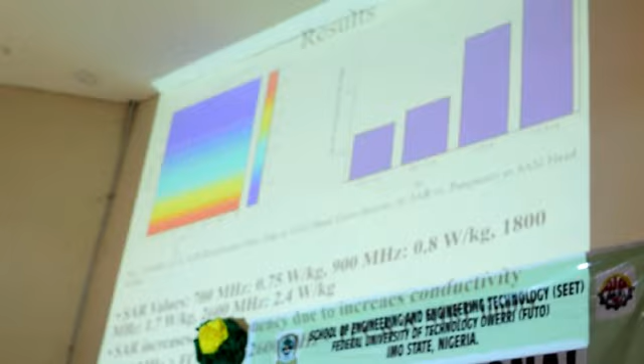Now, the results, I wish we had it on the slide. We have 2 graphs. One we call the heat map. Now, the heat map, what does it do? Okay, those are the 2 graphs. One is a bar chart, the other one is a heat map. The heat map, you can see at the bottom there, we have a somewhat reddish color transitioning from that to yellow and so on. Now, what this is telling us is that by the time you place the phone on

your head, the heat, physically you normally feel the heat of the phone after a while when you're making the call. So you can see that's the heat on your skin. But as the heat travels in your body, it is cooling down. So by the time you get to that blue section, it has totally cooled down. So you can see that part is your skin, not even going into your head. The skin surface is the outer layer, the epidermis. That is what will feel the drop of the heat.

But by the time it goes into the skin, just your skin, the length of the skin, you see 8.5 millimeters there. That is the thickness of the human skin, combining epidermis, dermis, and the subcutaneous part. So as it goes in, the temperature tends to drop. That describes the heat, and that comes from using the SAR and calculating that.

Then the bar chart is to show us the rate of SAR with frequency. You can see that there are 4 frequencies there: 700 megahertz, 900 megahertz, 1.8 gigahertz, and 2.6 gigahertz. From observation, you can see that. Okay, to conclude, you can see that with frequency, we have an increase in the SAR. If you are talking about a specific device, most of these devices come with a specific SAR, and that SAR is used for different frequencies. It's a whole different story. Thank you very much.

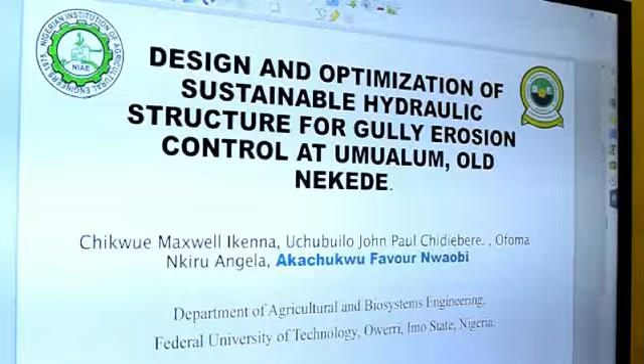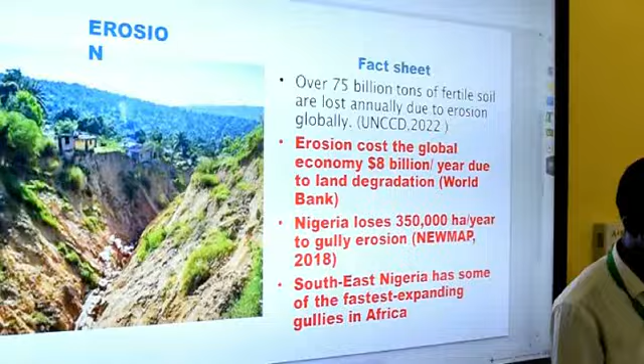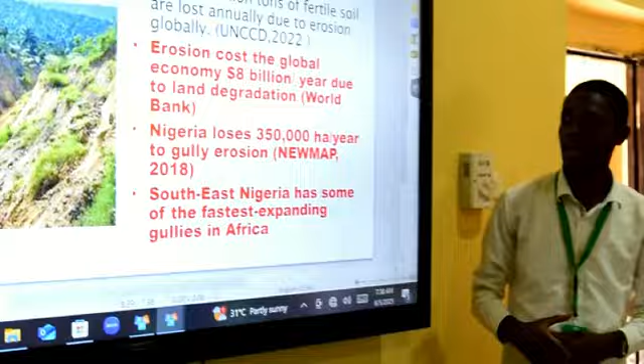I am Akachukwu Nwaobi and I'm presenting on behalf of the group: the design and optimization of sustainable hydraulic structure for gully erosion control at Nekede. Of course, we know that erosion is a global problem that involves the removal of soil particles by either man-made or natural factors such as air, water, and wind. Erosion costs almost $8 billion per year, and Nigeria loses 350,000 soil hectares per year by erosion. And southeastern Nigeria has some of the fastest expanding gullies in Africa.

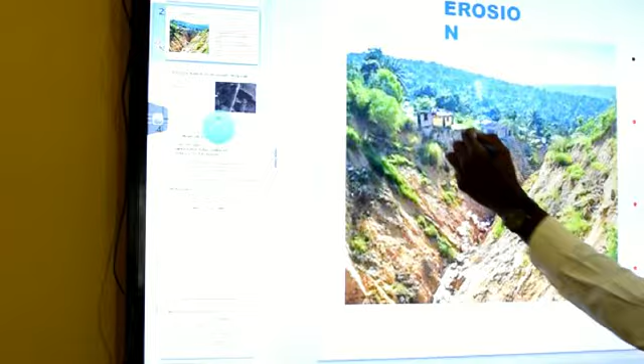So to deal with this problem of erosion, our case study is Umualum Nekede. With our GPS, we were able to capture the location, and we analyzed the geology of the area, the hydrology of the area, the kind of rainfall we have in that area, and we see the impact of erosion in this area, which is farmlands are destroyed and roads are cut off. So it begs the question, how do we mitigate this problem? The simplest or most sustainable way is to make way for the water, by building a very sustainable hydraulic structure to allow the water to pass.

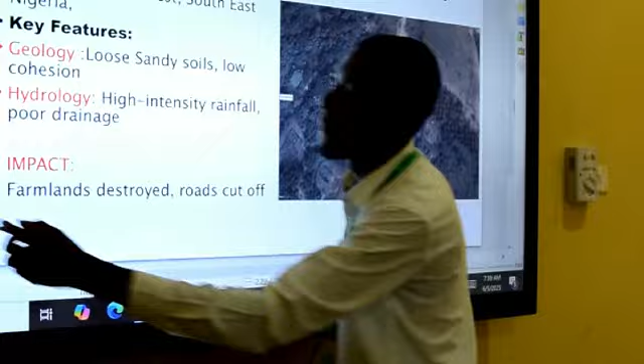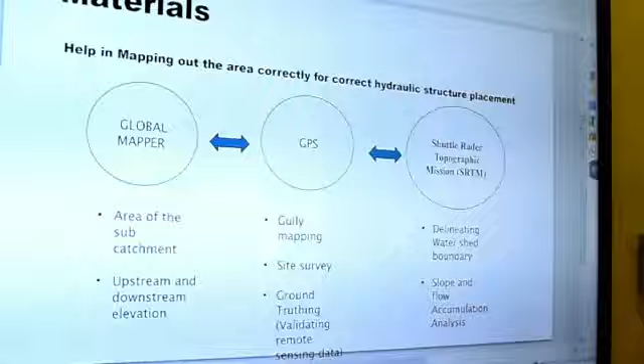And for us to do this, we made use of tools such as the Global Mapper, the handheld GPS, and the Shuttle Radar Topography Mission, combining this with GIS to get every information we need about the watershed in order to design a good hydraulic structure for that region.

Firstly, we carried out a watershed analysis for the time of concentration, which is the time it takes water to move from the farthest part of the catchment to the outlet of that catchment area. The time of concentration is a function of the overland flow and the channel flow. To get these two parameters, we made use of the Kirpich formula, which is a classical formula, and the Kerby method. To get the overland flow, we made use of this model, which has been accurate owing to the parameters we gathered in that given catchment.

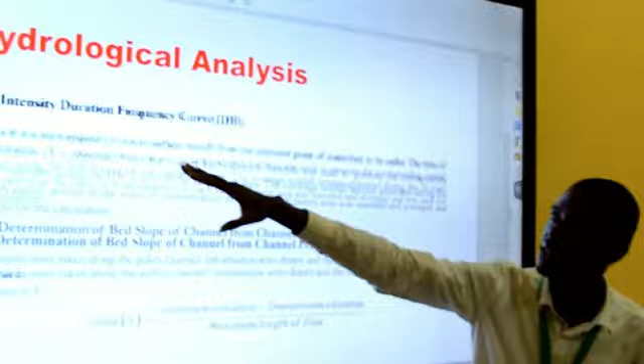We carried out hydrologic analysis using the time of concentration to get the intensity of the rainfall in that area. After getting the intensity of the rainfall, we went ahead to get the slope of the area, which is just a function of the upstream elevation and downstream elevation of the catchment over the maximum length of flow.

Now, after getting this, we use it to get the peak rain, the peak flood that we can get from this area. With this peak flood, we can now design a sustainable channel that can carry out this flood, hence mitigating the problem of erosion in that area.

And to do this, we proposed the use of a horizontal channel and getting the area using these classic formulas, after which we were able to calculate the wetted perimeter, and then we went ahead to calculate the velocity of flow using the classical Manning's formula, and then we calculated the discharge from there. So if the discharge we get at the end of the day is greater than the peak discharge we calculate using the hydrologic parameters we gathered from that watershed, it means that our design is sustainable.

So with this, we're able to design a very good channel to convey the amount of water coming out from that region. But as a matter of safety, we also added parameters such as freeboard and the top width to make sure that in case there is any overflow in the catchment as a result of maybe rain exceeding the return period, any flood exceeding the return period, we're not going to have a disaster in the region.

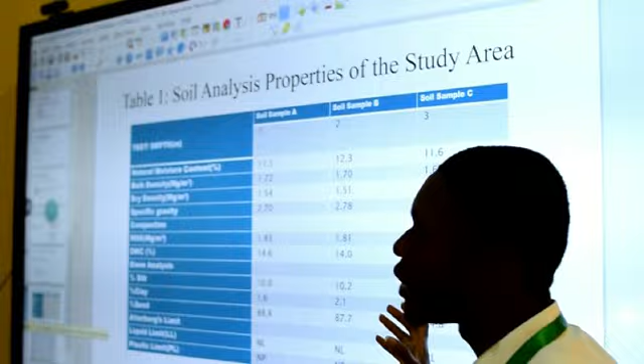So finally, by the time we carried out some of the analysis in the region, we got some of these, which I'm not going to list out. But it was what informed the decision we took in the design. And at the end of the day, we carried out many other analyses using the classical formulas I showed you to get these various figures used for the design of the channel.

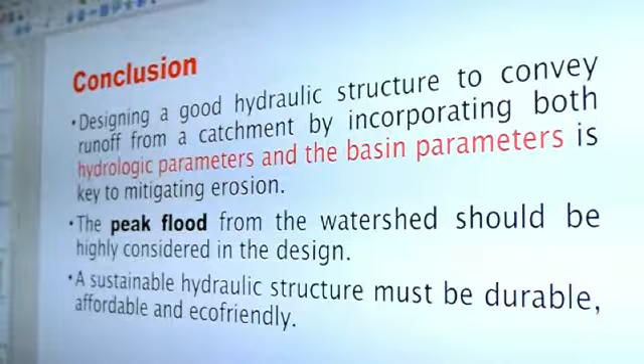And lastly, to just round it up, we discovered that designing a good hydraulic structure to convey runoff from that catchment has to do with involving both the hydrologic parameters and the basin parameters. So the peak flood from the watershed should be highly considered in every good design, and a sustainable hydraulic structure must be durable, affordable, and eco-friendly. Thank you.

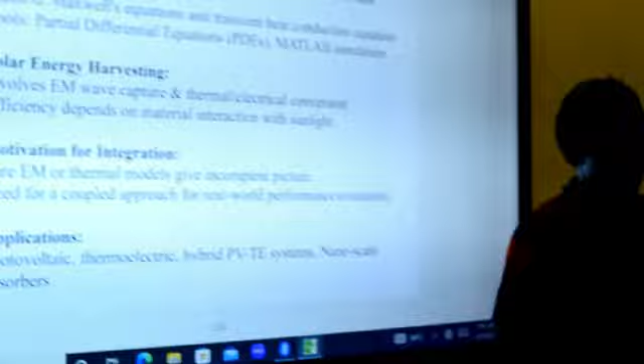Need for a coupled approach for real-world performance evaluation. Like I said before, that's exactly what it is. Like we say, two heads are better than one. So combining the two together, that is what it's giving you. Applications: photovoltaic, thermoelectric, hybrid photovoltaic thermal energy system, nanoscale absorbers.

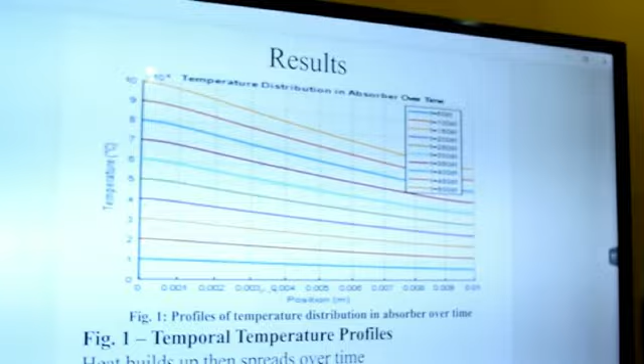Okay, so you did some simulations, and these are the results. This is the result of the simulation. This is showing how the heat is distributed in that material that you are using. You see your solar panel. You look at it, it's like a glass surface, isn't it? The actual material that is absorbing the photon is there.

So, just like you have the potential difference, you must have the high heat section and the low heat section. And this, we use Neumann and Dirichlet boundary conditions to achieve this. So we have the boundary condition at 100 degrees Celsius and 25 degrees Celsius. So, conclusion. It follows EM penetration pattern. I think that's part of what I just discussed.

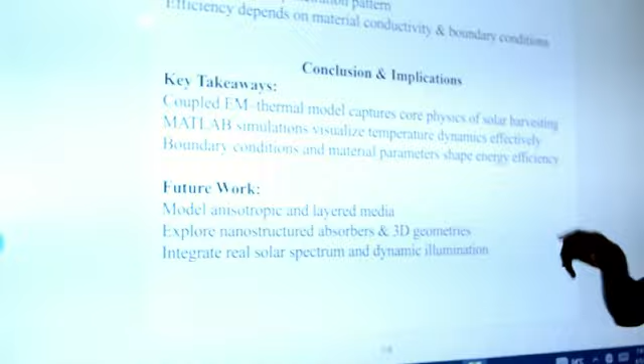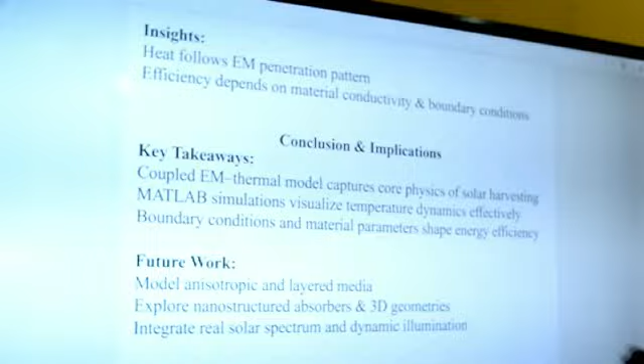The key takeaway: coupled EM thermal captures core physics of solar harvesting. Then the MATLAB simulation, with which we visualize the temperature dynamics effectively; boundary conditions and material parameters shape energy efficiency. So for future work, model anisotropic and layered media. Then explore nanostructured absorbers, 3D geometries. And finally, integrate real solar spectrum and dynamic illumination.

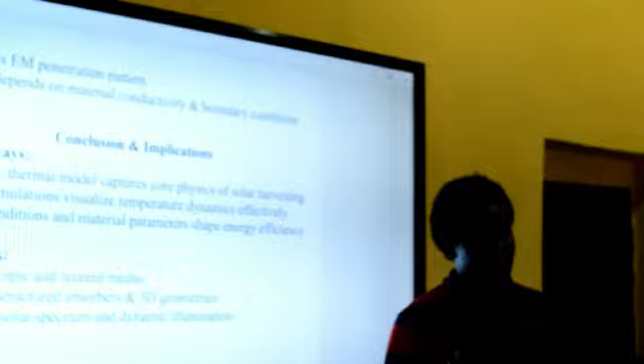So that, in a nutshell, is how you theoretically explain the combination of the photon energy generation and the solar heat energy generation and combine them. A round of applause.

J.S. Nzube with K.C. Chinedu, C. Chiabotu, and R. Uche. The representative will be presenting on the topic titled Design and Development of an Automated Car Wash using a PLC-based system. Okay. Titled The Design and Development of an Automated Car Wash using a PLC-based system. This is in line with the introduction of the smart city, urban engineering.

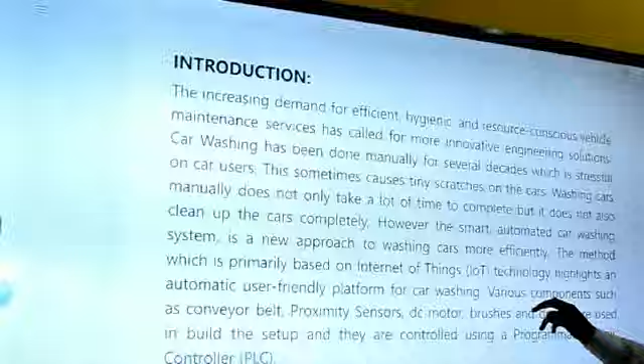With increased demand for an efficient and hygienic way of vehicle washing and maintenance, the introduction of this system is going to solve the problem we have when it comes to manual washing of our vehicles. Introducing this system will help to save labor, be cost efficient, and we are in line with the introduction of the smart city and urban development.

When it comes to the problems we face with our normal traditional way of washing cars, which is the manual way, there is the consumption of excess water, reliance on heavy manual labor, lack of consistency in cleaning, and integrating with the smart infrastructure framework.

Like we all know, this is an automated system, and we know in our current industry the vital role that automation has, starting from the production industry, our refining industry, and the rest. So,

I think you should state the objectives. They're very important. Yeah. The main objective of the study was to design and develop an automated car wash system controlled by a PLC. A PLC, or programmable logic controller, is the control system used in the industry that helps to automate different kinds of systems. It helps to save labor and makes things faster.

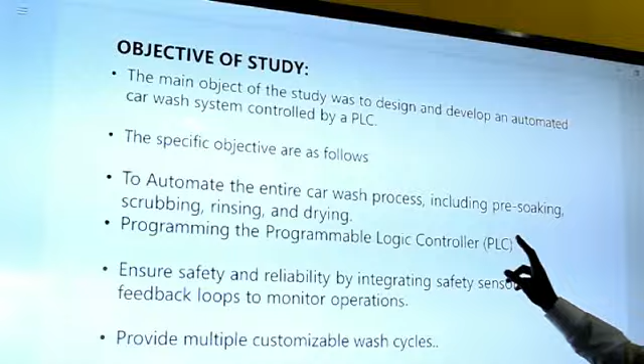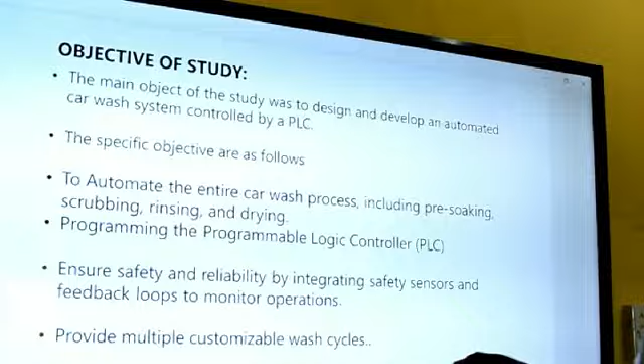And to automate the entire car washing process, including the soaking, the scrubbing, the rinsing, and the drying system. Programming this programmable logic controller to suit the need of that particular system, ensuring safety and reliability by integrating safety sensors and feedback loops to monitor operations, provide multiple customizable washing, and integrate the use of IoT in the sense that the owners of this car wash can know the number of washings done, how much they have made, monitor the system and change it based on the need of the users.

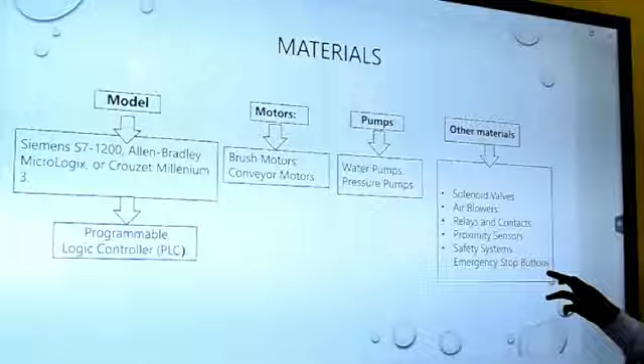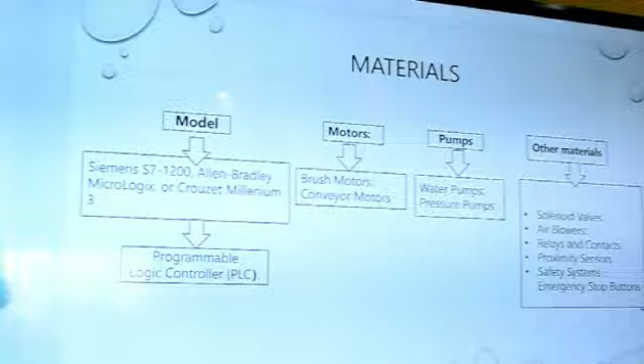This system reduces manual labor, ensures consistency in cleaning, and minimizes the usage of water. The materials in this system: with the use of special instruments like the valves, relays, blowers, pumps, brushes, and our main mastermind, which is the programmable logic controller, this system can be achieved. Why we focus more on the PLC is that in our modern industry, this PLC has offered a lot to us in terms of making work easy and giving us smooth processes.

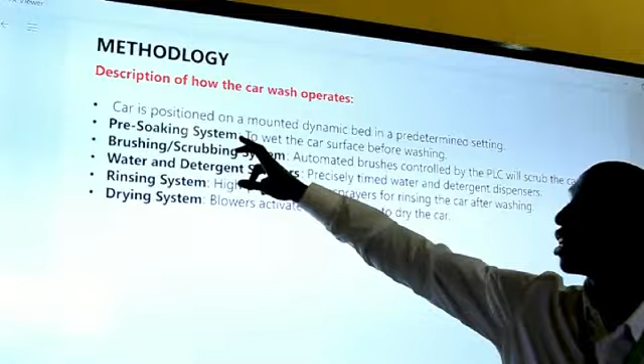So these are the processes involved in how the car wash will be made. When the user of the car wash brings his car, he parks it in a good position. Then the system starts. When you make your payment and select the type of washing you want, you start with the soaking, then the scrubbing. After the scrubbing, the rinsing, then the drying. These are all done automatically.

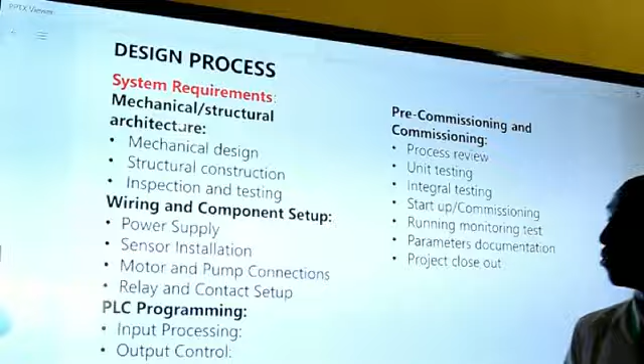So in this system, there are different design processes involved, starting from the mechanical and the structural, which is the bay. The civil engineers will design the bay where the car wash system will be developed. The mechanical engineers will do the metal work and everything.

Then when it comes to the wiring and components, the electrical engineers will come with the installation of the sensors, the motors, the pumps, and lots more. Also the electrical engineer will do the programming of the PLC, because this PLC can be programmed to do anything we want, however we want it to work. Then the commissioning. So this is a sample video.

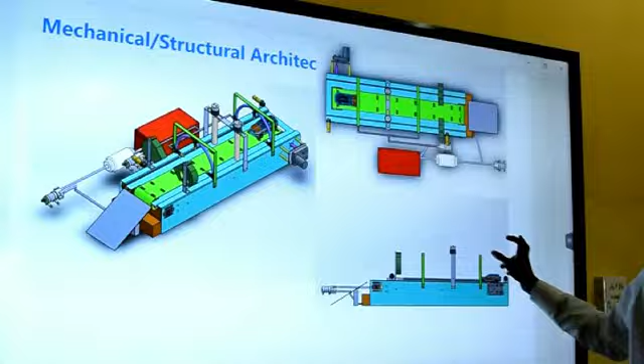So this is the design I made, and by God's grace, a working prototype of this project was designed early this year. It was used in my final year project in February, supervised under Professor Benuche and Engineer Chukwuebuka Kinsel.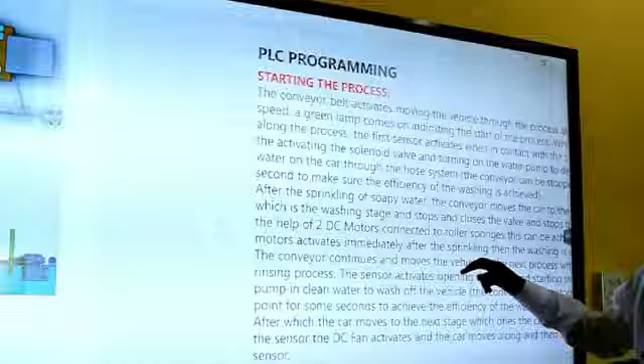So as you can see here, this is the water recycling component. The working prototype is at the department. This is the water recycling component with everything here. The time is almost up. So this is the process, or the program. This is how it will look when you're inputting or writing the program in the PLC.

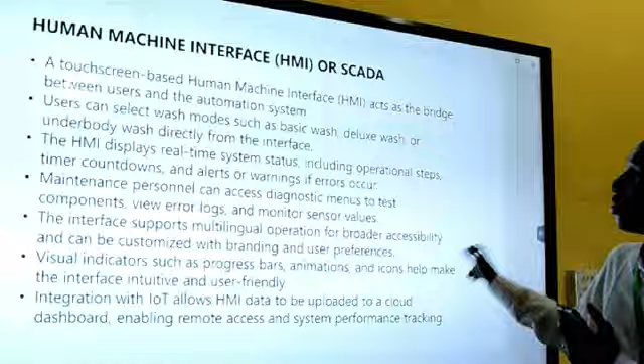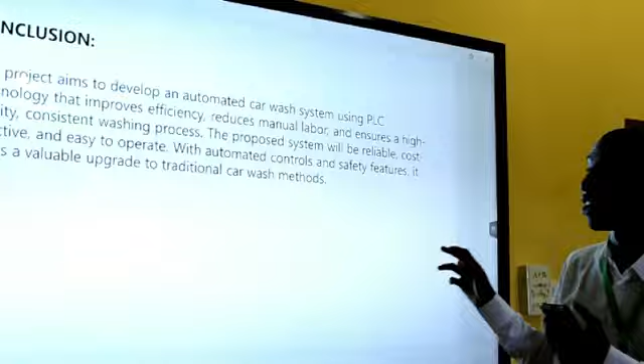So, with this process, the average time you can use to wash a car is about 3 to 5 minutes, which will save you time, unlike the conventional manual process, which takes over an hour, and the consistency in the manual process isn't very high.

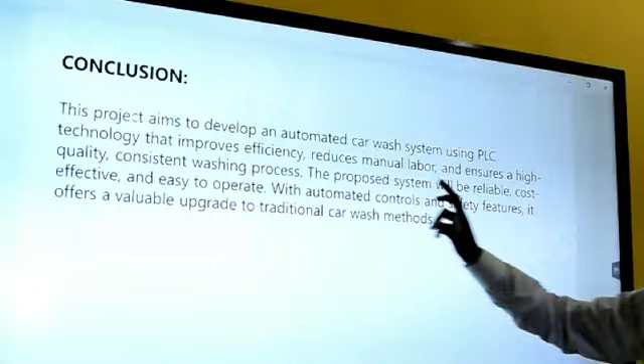The primary aim is to develop an automatic car wash using PLC technologies to improve the efficiency, reduce manual labor, and ensure a high quality, consistent washing process. The proposed system will be reliable, cost-effective, easy to operate with automated control and safety features. It offers a valuable upgrade to the traditional car washing system.

Wow, that would be very wonderful.

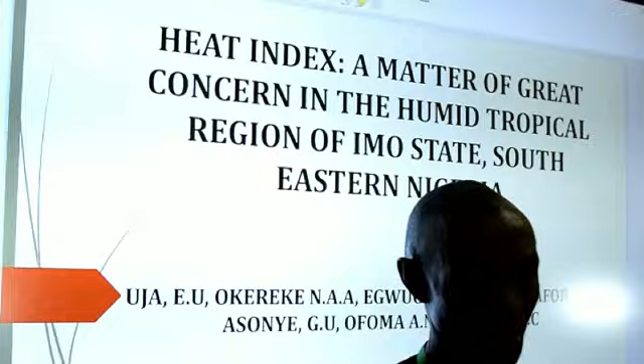After I reviewed a paper for the International Journal of Environment and Climate Change about heat stress and heat index, I felt that we in the humid tropics should have knowledge of these things. Because when I reviewed that, I discovered that most of them were having stroke there. So to do this work, heat index, what is heat index?

Heat index just means what the relative humidity could do to the air temperature to move it up, to bring it up. And what is relative humidity? Every level of temperature has a capacity to take moisture. But the moisture in the air may not be to that capacity. If it is not, then the temperature can absorb more moisture. But where the moisture in the air is so much that the temperature can no longer absorb moisture, that is the critical stage.

Oftentimes at night, you see yourself sweating profusely. Ask yourself why. The windows are okay, ventilation okay, but you see yourself burning like you had a bath. It's because the moisture in the air is so much that the air is no longer taking what comes out of you. Are we communicating? To get the data for the study, I went to NiMet.

Can you present the data with slides? The introduction.

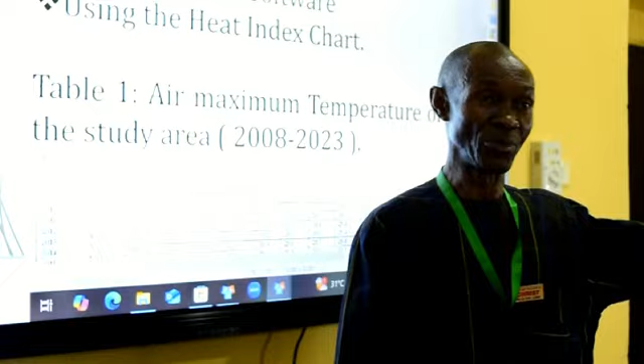The air maximum temperature and the relative humidity of this state. Before transferring to heat index, I used the Statistical Package for Social Sciences to see how they correlated. I discovered that any change in the relative humidity will cause over 80% change in air maximum temperature. That gave me the correlation.

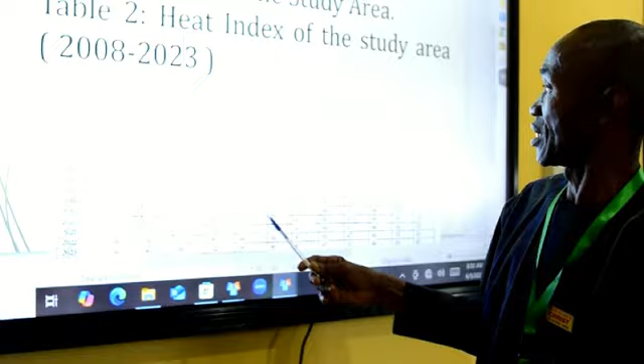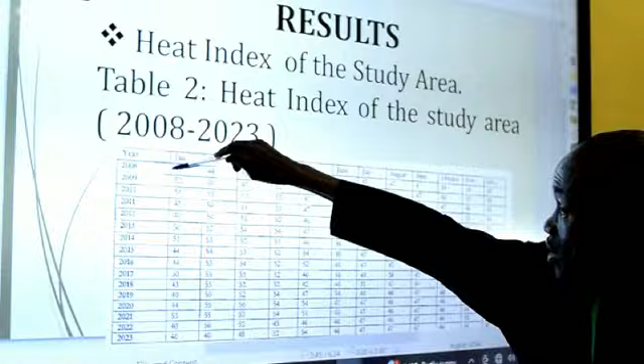Now, to the heat index proper, these are the data of the heat index. Going back, this is the air maximum temperature. With the heat index chart, you take the value of January and the relative humidity of this place, and you go to the heat index chart to see the heat index of this point. So I got the heat index of each of the months from 2008 to 2023.

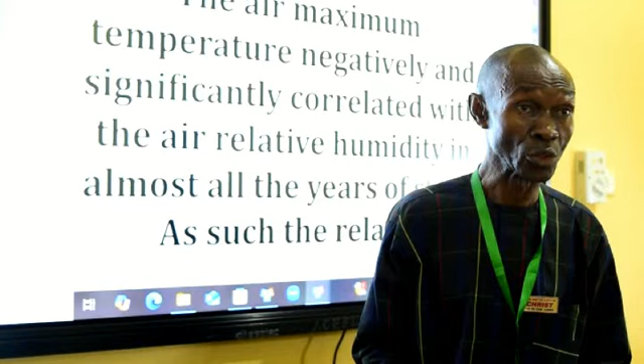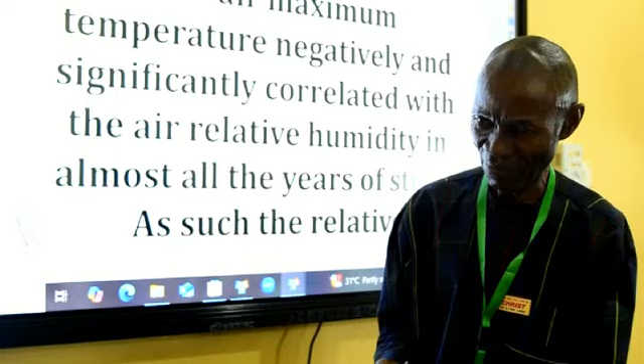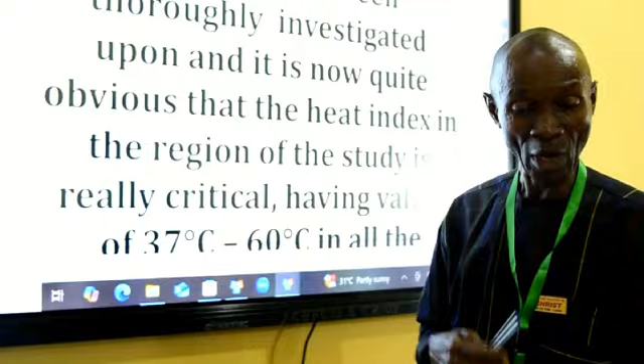If you check through the study, I discovered that I got from 37 degrees centigrade to 60 degrees centigrade because of our relative humidity, which means that we are exposed to heat-related sicknesses. So it's not a function of going to the hospital. It's important to know what causes what. So this temperature is exacerbated by relative humidity in this place. So how do we go about checking this to live long?

Now, my advice is this. If you have a fan in the house, maybe the place is hot, and you on your fan, be careful. It may blow hot and give you hot air, whereas this thing is not in the room. It's in the atmosphere.

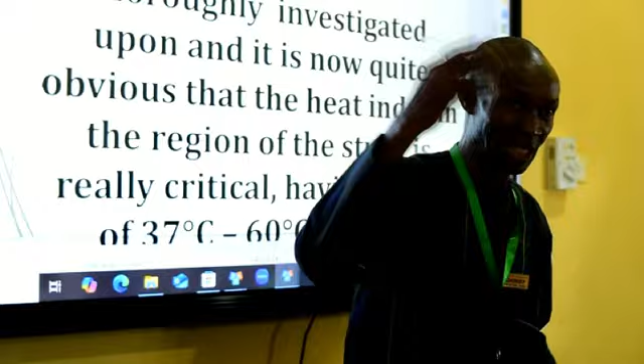One other thing I will advise us, anything you do, like generator sets, activities that will exacerbate evaporation of moisture, let us reduce it. Because the more this moisture is evaporated, when you perspire, the water vapor may not get out of you to refresh you. It becomes a problem.

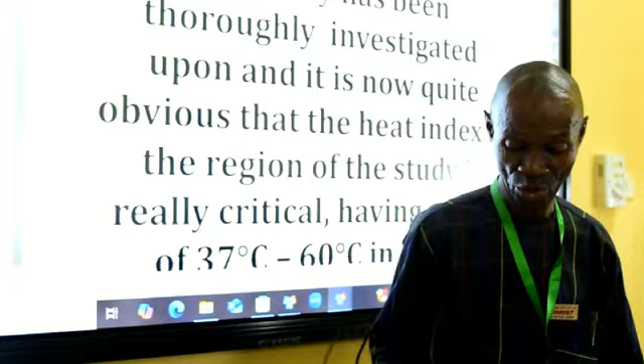I think most of the presentations here are about things we witness in our day-to-day activities. Sometimes we get warnings either from the internet or from the media that the heat waves are going to be high, and you are advised to hydrate yourself with water. And this is a typical example of another method that you can apply to be able to help yourself out during such conditions.

So thank you, Mr. Oja, for this presentation. In other words, if we can take care of our environment, we are indirectly taking care of our health. Thank you very much, sir. Thank you.

Engineer Professor Remy Uche, Fellow of the Nigerian Society of Engineers, and the Dean of the School of Engineering, Federal University of Technology, Owerri. Thank you very much. You know that conferences are an integral part of academic teaching and research. At conferences, we try to do an exposé of your research products. At conferences, you meet colleagues from different locations with different mindsets to exchange ideas and views on the current trend.

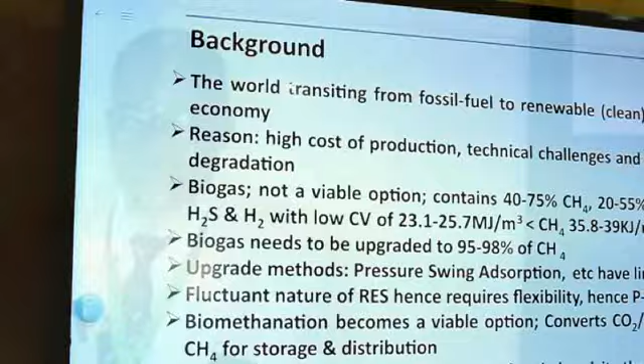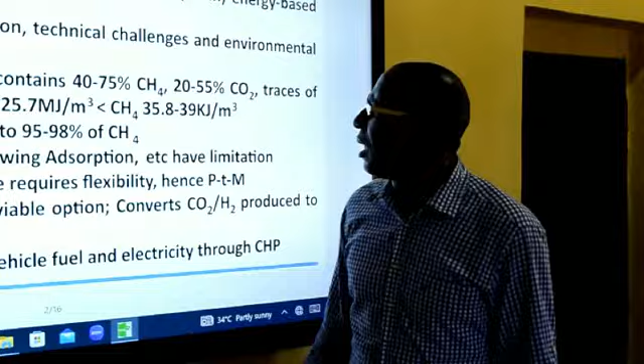We carried out in Scandinavia, and yet it gave about 70%. We still have carbon dioxide contained in the biogas. So that's not a viable option. It contains 40 to 75% of methane, 20 to 55% of carbon dioxide, and traces of hydrogen sulfide, and then we look at the calorific value of 23.1 to 25.7 megajoules. Then look at methane, 35.8 to 39 kilojoule per meter cube.

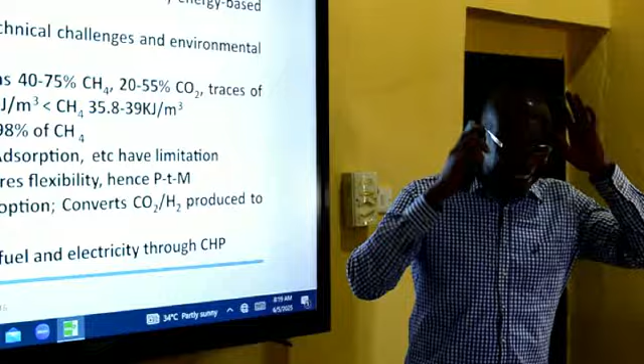Biogas needs to be upgraded. Therefore, we need to upgrade that biogas again. So talking about anaerobic digestion, we have gone past that stage. Engineers are thinking, critical thinking. What do we do? So now, upgrading method, pressure swing. We have pressure swing system. You purify the biogas. But where do you send the carbon dioxide? Still environment. You practically do nothing. You're pushing the carbon dioxide into the environment. So we don't use that.

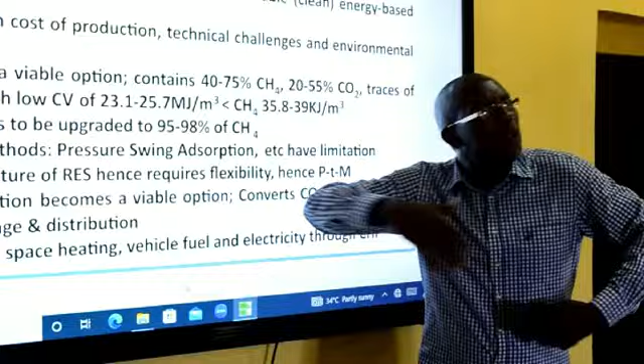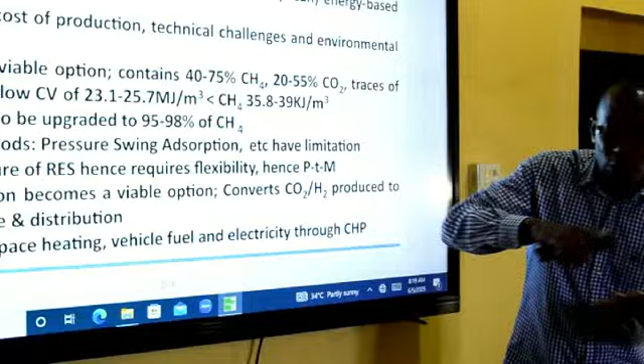Now, there's a system called power to gas. Power to gas. Hydrogen, then store it, then distribute it. Because the renewable energy we're talking about, the solar and all this, they are inflexible. Due to the inflexibility of the renewable energy sources, when you need it, it will not be there. When you don't need it, it will be there, wasting away. How do we save this energy? So we use green hydrogen. We use the system called power to gas. That power to gas now, we produce hydrogen.

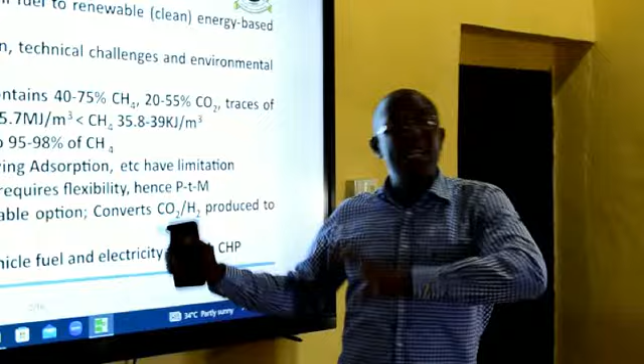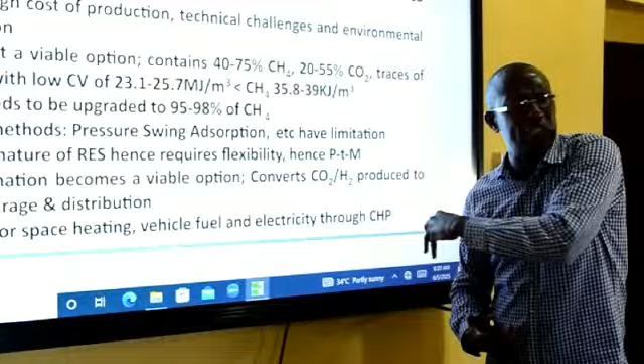The prof was asking, how can we produce hydrogen in Nigeria here? It's very simple. Green hydrogen can be produced. Sea water, use it, then use electrolyzer. We produce hydrogen. The green hydrogen, that clean one, not the petroleum one. So this green hydrogen, once you produce it, you use it to power a biomethanation plant. The process is called biomethanation. You valorize the carbon dioxide using that green hydrogen to produce methane. And studies have shown that yes, we can do that.

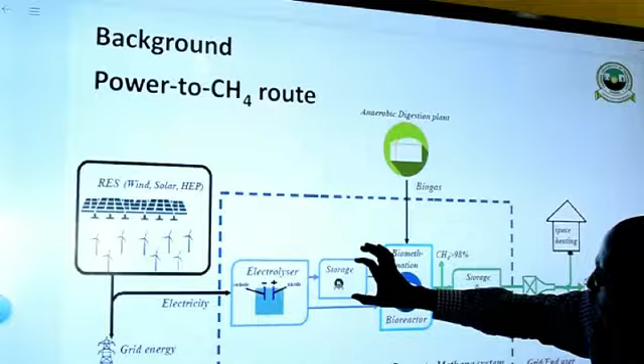So here, biomethanation becomes a viable option to convert this carbon dioxide and hydrogen produced to form methane for storage and distribution. Methane used for space heating, vehicle fuel, electricity through CHP. So this is the model, this is the system, how it works. These are renewable energy: wind, solar, hydroelectricity, grid, get to electrolyzer. Then from here, storage. The storage is working with the biomethanation plant. Here is biogas. That's anaerobic digestion.

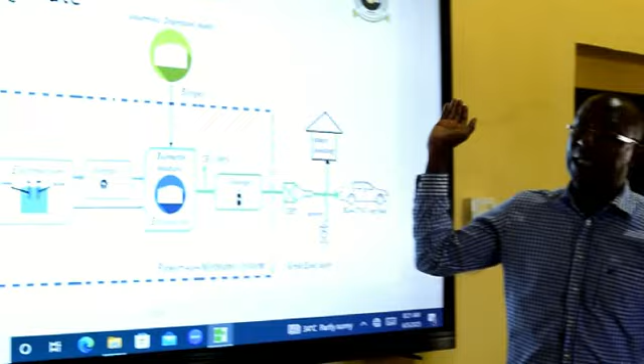We're no longer talking about anaerobic digestion. We have gone past that stage because it can't give us the 95%. Because remember, the natural gas that is being used now is about 95 to 100% methane. So you must convert the biogas to 95% methane to be able to use it in CHP and other things. So the biogas produced here, which is about 60% methane, you now inject it into this biomethanation process. This is where we come in.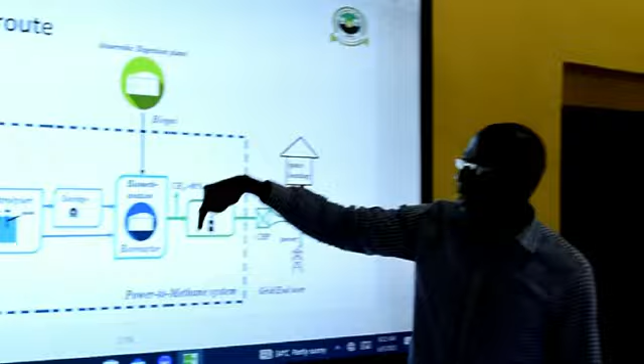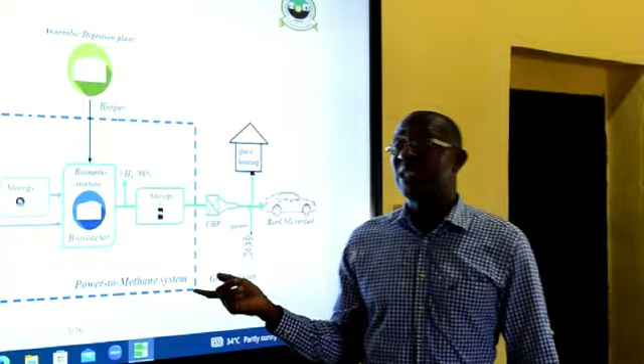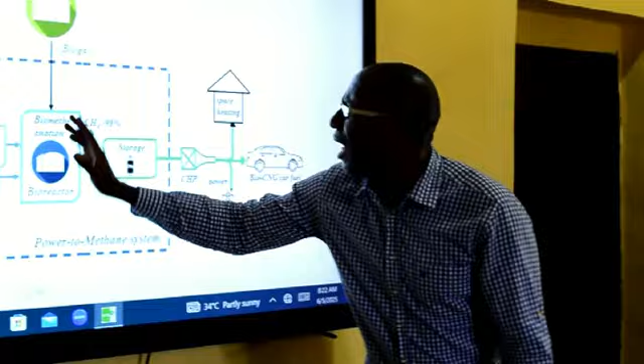So this biomethanation process, we have two methods, in situ and ex situ. The in situ is the anaerobic digestion producing the biogas, then you push it into the biomethanation system. We have the TBR, the trickle bed system, the bubble column reactor, and the CSTR. The CSTR contains a moving part. We don't want to design something that will also be consuming energy. So bubble column reactor and TBR don't have moving parts. From here, you convert this to 98% methane.

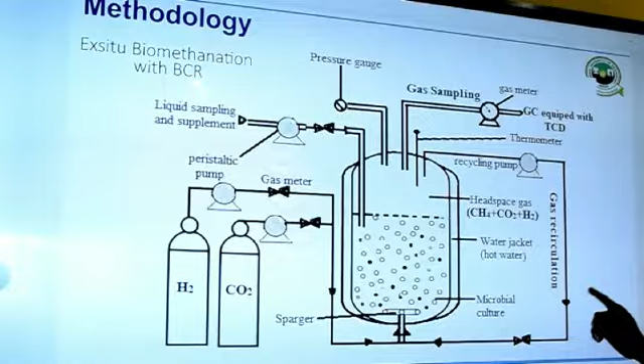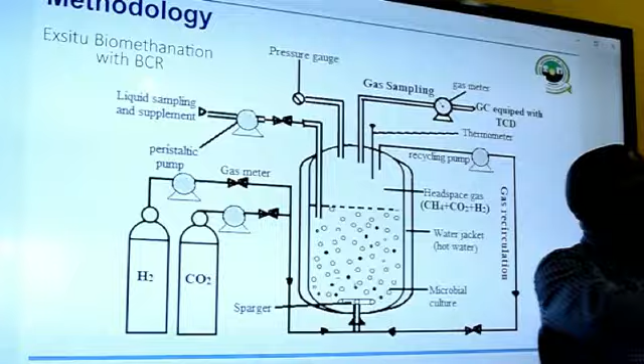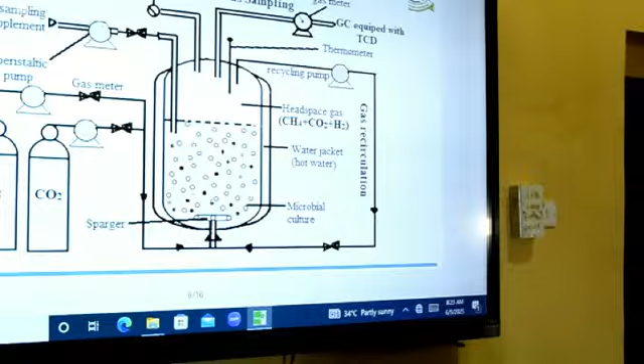At that point, what we have is methanogenesis, where we use hydrogenotropic methanogens. That is what works here, and they convert hydrogen and carbon dioxide to what? Methane. So now, we got these vessels, but here what we use is an ex situ system. That was why I was asking them. The ex situ system is where we are going back to what?

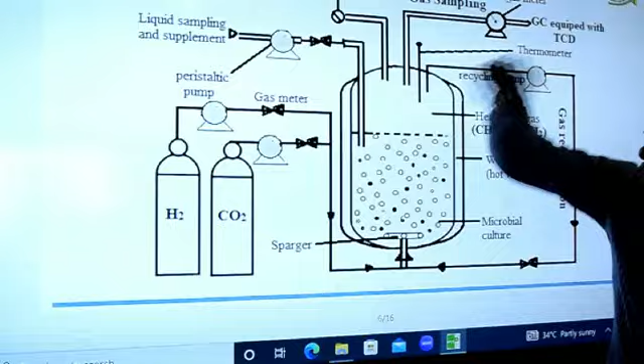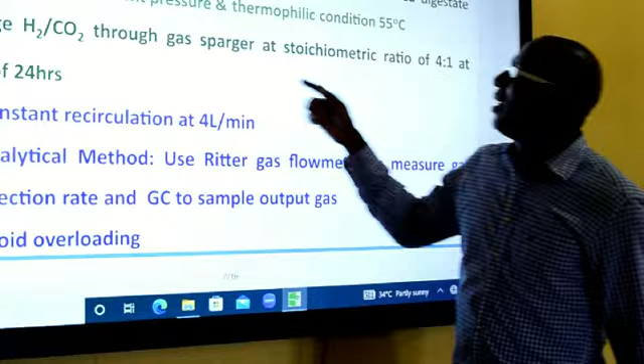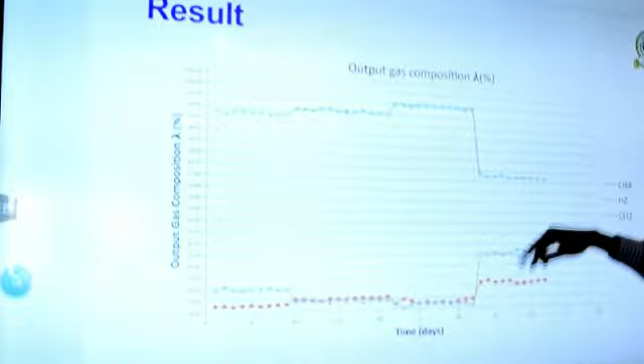So that's the methodology. Then, okay, the conclusion. Look at it here, running. Now this is for 42 days. From 22 days to 32 days, we have what we call steady state, where it's producing the highest level of methane. That is at this point.

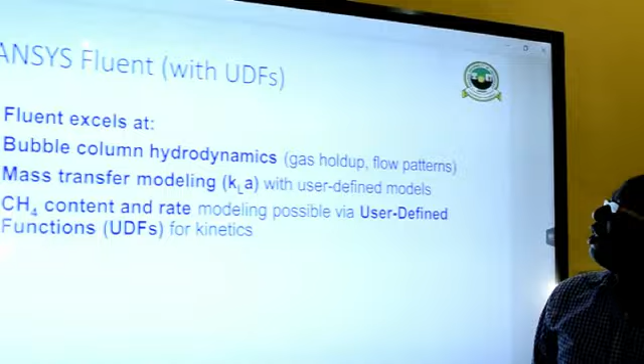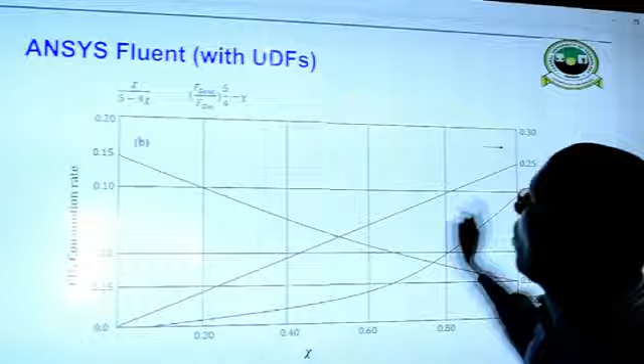If you exceed there to sparge more gas, it comes down. So this is what we used to do this simulation, ANSYS Fluent with UDF, because you have to run the modeling itself. And then from there, this is what we got. What this means is that you can actually stay in your house and input hydrogen. This is the quantity of hydrogen we are going to input, this is what you are going to get. This is the carbon dioxide we will input, this is what we are going to get.

But the stoichiometric reaction is 4:1. The 4 is the stoichiometry. I think the reaction is there, but maybe later we will get to it. So this is the conclusion. High methane production rate of 3.2. The BCR was successfully used to upgrade the methane to 95%.

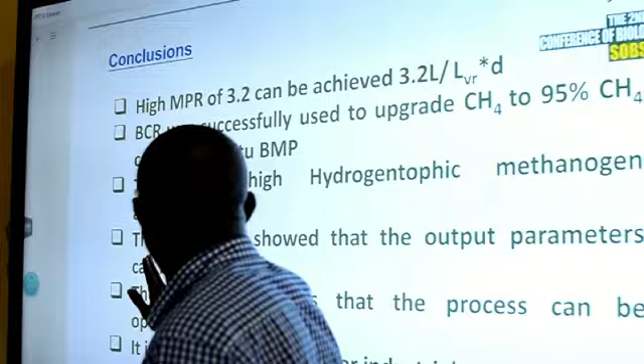There was high hydrogenotrophic methanogenic adaptation. The simulation shows that the output parameters can be predicted, that the process can be optimized further, and that it is possible to scale up to the industrial process. Then recommendations: government investing in that and all that. Yes.

At this moment, so that we round up, if we have questions, please raise up your hand. The first question is going to the first speaker. Please, I would like the first speaker to tell us the safe concentration of these heavy metals, because I came in a little bit late. So I want to know if he stated the safe concentration.

Yes, the person that is talking about Umedo. That's the second. He mentioned lead, arsenic and all that. So please, by the UN convention, what is the safe limit of this heavy metal? And in the experiment, what is the concentration of this heavy metal in the ripe fruit, so that we can compare for ourselves and know that this experimental value is actually higher than the safe limit?